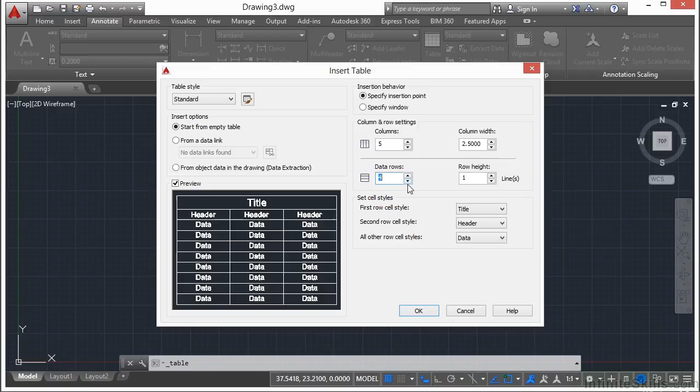You pick your table style, just like you would with a dimension, multi-leader, or text. You can click here to launch a table style dialog. This is one way to create a brand new style. A style will have things defined in it, like headers and the text that goes in them. So once we've defined a few things like rows and columns, click OK, and then Insert.

And then you just start typing it in, and it works just like it would in a spreadsheet. So if you're familiar with working with a spreadsheet, you'll find tables very similar and very easy and simple to use. They're nowhere near as powerful as a regular spreadsheet program, of course not, but it gives you something that automatically grids your work, and gives you different options similar to working in a spreadsheet.

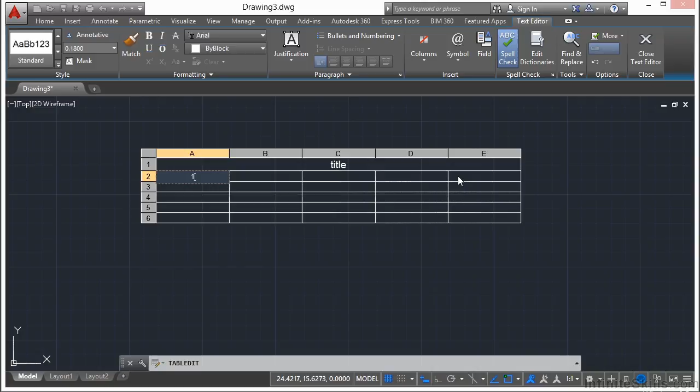So for example, if I have numbers in here, number 1, I press enter, it goes down to the next one, 2, let's say 55, and then 17. When you're done editing the cells, just click anywhere else inside your drawing area. Now, to select your table, you just pick any part of it, and you can have access to that there.

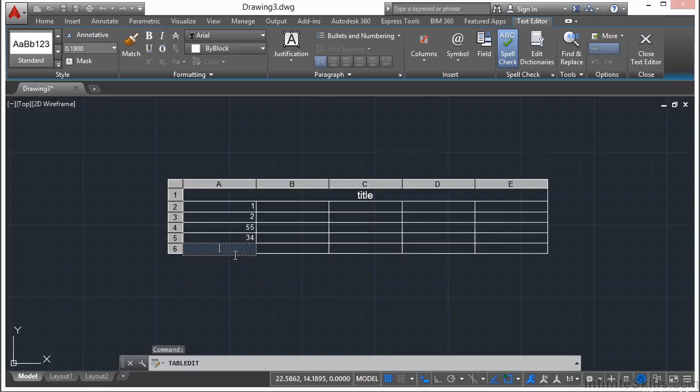So if I want to change this to, let's say, 34, I just start typing it in. Now I can select the cell, and if I double click in it, it gets me into like a text editor similar to the multi-line text where I can work with this text. I can match properties, bold, underline, justification, etc.

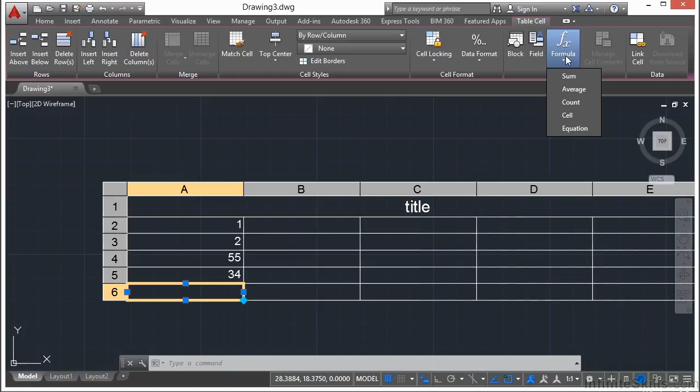If I select this cell right here, I can go to data format and I can change some of the format, text, date, currency, etc. I can also go to formula, so I can click on sum, and then I just pick with a selection window, the cells that I want to sum. Looks just like a spreadsheet. Press enter, and there I have a sum.

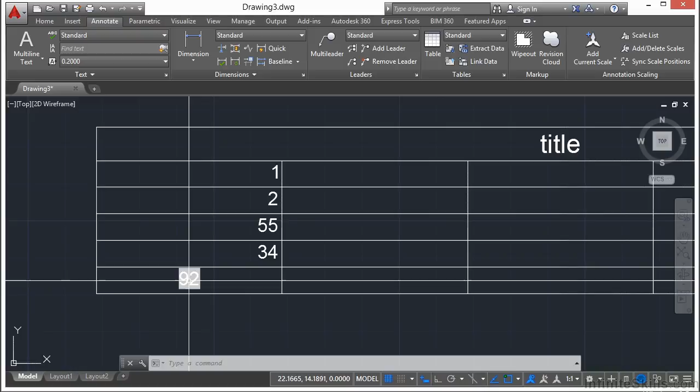Now it puts a little gray box behind it. That just tells you it's a special field. That gray box won't print. That just lets you know that this is an automated feature, and if I change one of these values now from 1, make it very obvious, to 200, that's going to automatically update. So that's a really great feature to have right inside your AutoCAD file.

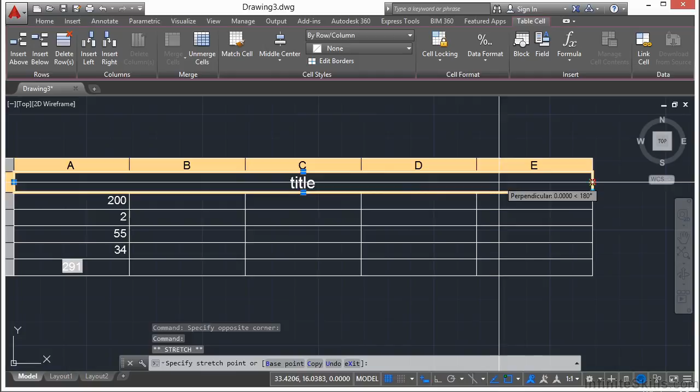You can manipulate your table with grips. So you can see here, you have a left, right, and some other tops and bottoms. The left and rights kind of act like stretches, and so does the up and down. If you click on the top of a column, you can stretch those different column widths. If I select this top box here, I pick everything, and then I can change the overall width or height.

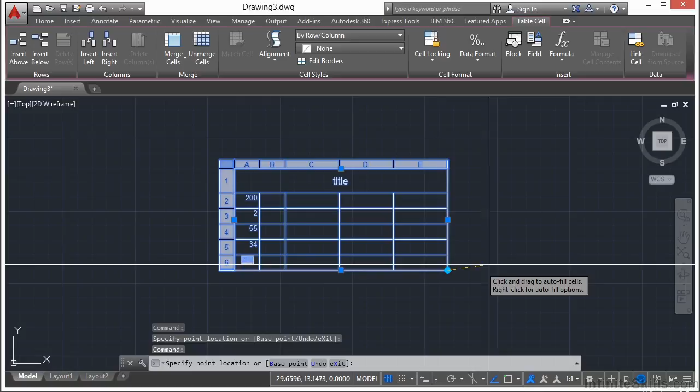If I click here, it will automatically fill the cell, and that can get you into trouble sometimes, but a quick undo will set things back. So you can do things like that.

If I pick a cell and I right click, I get a lot of my different options right here. I can change my cell style. I can change it to a data, a header, or a title. I can even save it as a new style if I'd like. I can set a background fill.

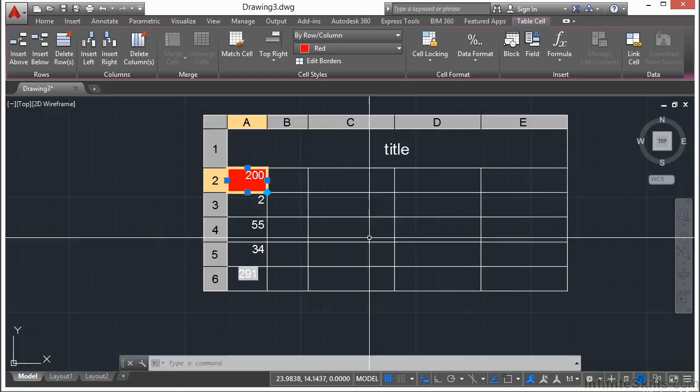I can also do these things by selecting multiple cells at a time. Just hold on your shift key and click where you want. Right click, you can change the borders. You can put in a double line, go all the way around. You can do that.

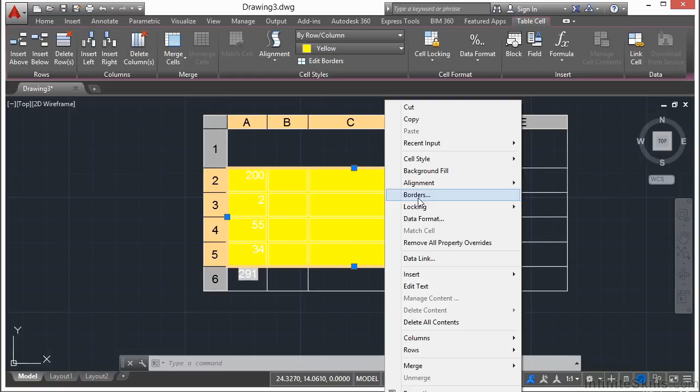You can right click again. You can change the background fill to something else. As you can see, that's very hard to see. Change it to black. I can also change my alignments.

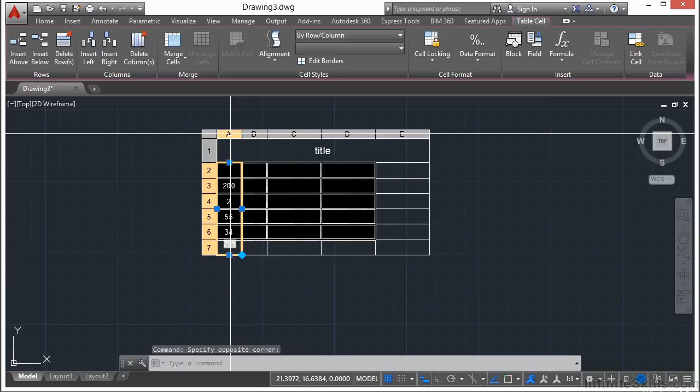So there are a lot of different things that you can do with a table. If you need to add or delete rows, just select a row, right click, say delete row, or insert row below or above, and it adds it right to it, or it will take one away. Same way with columns. You can insert a column to the right or to the left, and so on.

Now, if I pick two cells, I can merge them together. I can merge them all by row, whatever it is I want to do. So as you can see here, there's a lot of functionality in a table that works extremely similarly to a spreadsheet. So if you're familiar with working with spreadsheets, working with tables won't be a problem for you.